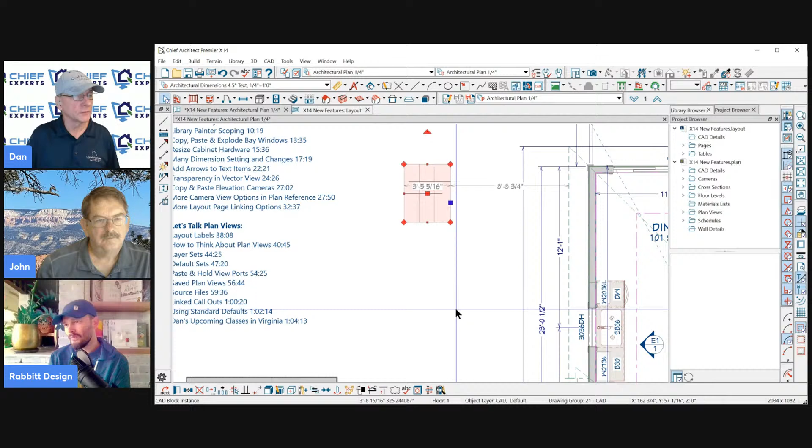Now you'll notice when we have an icon here, it's not the same colors, but I might have put the wrong icon. There's your explode block icon. Okay, so if you click on that, it won't be a block anymore. It'll be back to the individual CAD lines. Now let's just take that one. Do we want to take that one step further? How you edit a CAD block? Sure. Okay, we'll go one step further.

You'll see another little icon blowing apart with a pencil on it. All right, this is something they added, I think, in X13. You can edit the CAD block. You can edit the items that are in the CAD block without exploding it. So if you click on that, it's going to open a new tab. You'll notice what it says up here. It says CAD block window 1.

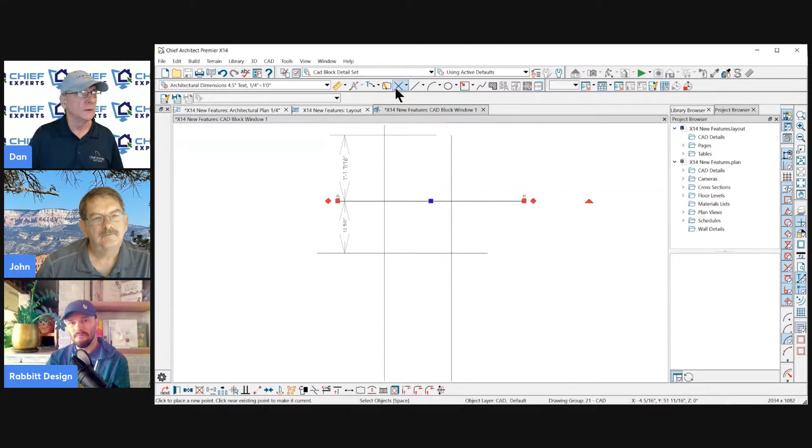All right, so there's those CAD lines, and now I can work on them. I could edit them. I could add items to this. I could add text to this. I'm going to display the text here though. So there you go. So I can edit this all day long. When I close this window, what do you want to do with this now? Remember, I never exploded the block. I'm just editing the block. Now I want to save it. Okay, so I'm going to save the edits I did in that.

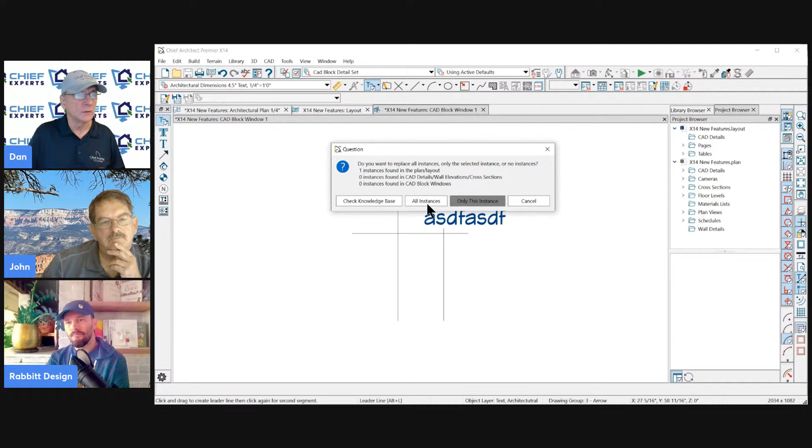And you're going to get another screen that says, let's say I changed an outlet in my plan, the CAD block that is an outlet, to a different size, or I added something to it, I could update just the one I changed, just that CAD block. Or if I have a whole bunch of outlets in my plan, I could update them all at once, just by clicking that. So I'll just click only this instance. Actually, I said that backwards, but you get the idea. There you go. So there's my changes. It's still a CAD block.

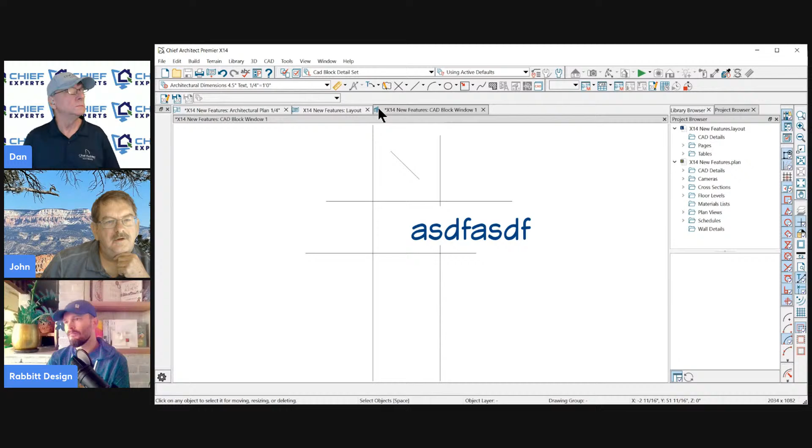I'm good to go. So I saw that when you opened that to edit it, it put it into a CAD detail. Is it still in the CAD detail? No, it doesn't put it in a CAD detail. It just opens it up in a CAD detail, but it doesn't put it in there. It opens it up in a tab. Well, that's a CAD detail sign right there at the end of it, though. Oh, by golly, it is. But it doesn't put it in the CAD detail, though. Okay. I don't know why it does that. Yeah, that's just a CAD block.

Right. But so if you go into CAD block management, CAD detail on the tab, right? Or was there something I can't see? Well, go to CAD block management. Okay. So it is putting it in the CAD detail management category, but it's not actually putting it in the CAD detail. So why, I don't know, John. You got me on that one.

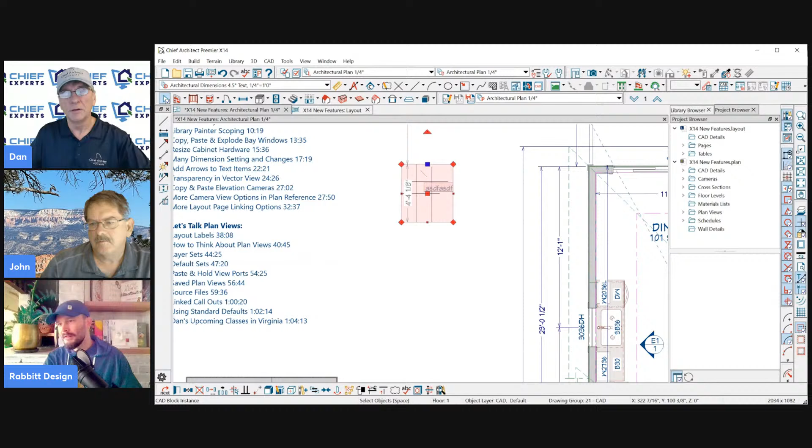All righty. The icon was red. It's different than explode with all blue. I don't know why it was a different color. Do you know why it was a different color? I'll conclude this by saying that spinner wheel, I just dumped a bunch of icons in there. I didn't even look at what they all were. So next time we'll be certain to know we have the right icons. By the seat of our pants. Yeah. There are over 1,200 icons in Chief Architect now. So we'll have some fun with that.

Okay, let's move forward here. Last week we talked about these different things: predictive feedback, CAD layer defaults, library scoping, copy paste, explode bay windows, resize cabinet hardware, many dimensions. I'm not going to go over that. Then we talked a bunch about plan views. This week, let's talk about these few things. Library painter scoping. Actually, I think I did talk about that last week. Let me make you dizzy by going in and out here a lot.

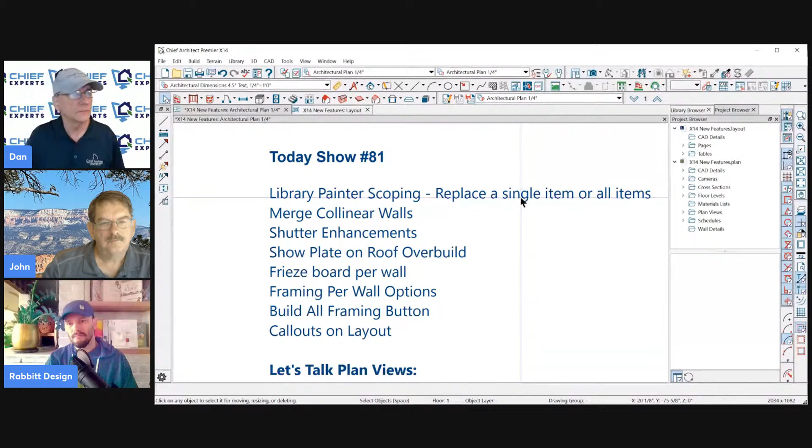Let's just review that real quick - what is that library painter scoping? So if I go into a 3D view...

By the way, when you get your PDF downloaded from the page...

Hey, someone made a comment and they're absolutely right - you did a CAD block, but the symbol that was on this spin the wheel was an architectural block. The architectural block is any kind of symbol class block together, same concept. Yeah, it's a good point though, thank you for correcting that. Yep, obviously I did get that.

Well, we're all learning here. All right, let me get back to where I was. I was going to my PDF, I had clicked on something and my screen froze there for a second. So here's your PDF that you're going to get when you download it.

So when I go in here, the library painter scoping - when you want to replace individual items on things, and again I think I covered this last week, but let me just do it again real quick.

Get into Chief here - oh, Chief crashed on me. Oh weird, it was that wheel spinner thingy that caused it, maybe. I've been having my share of issues with my computer, so I just updated my drivers yesterday, so hopefully that'll take care of everything else.

All right, so back to this. Yeah, that crashed when I did a 3D view. Hope that doesn't continue. It's not the wheel picker thing that's causing it.

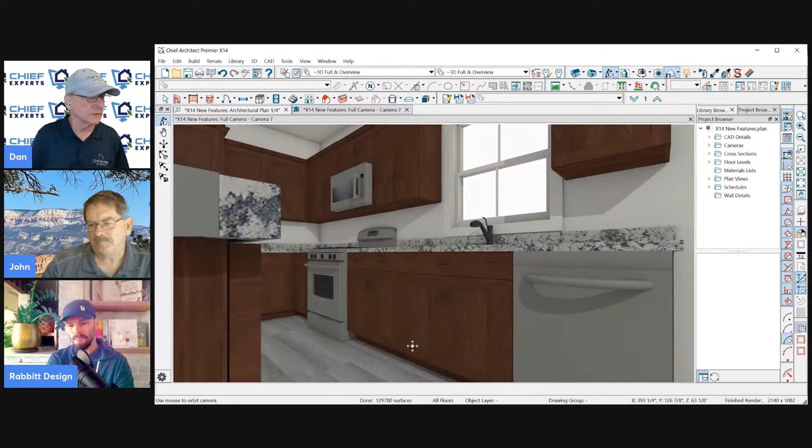All right, so we've got a piece of hardware here. Let's find a cabinet that's got multiple hardware on it. So we've got this, and it's got 3 different handles on it. I could go to my library and search for a handle.

I know I did cover this, but I'll cover it one more time. It's really cool, so I did that barn door handle. I'll do the same thing - when I click on that library and drag it and come to my screen, you see it...

Okay, and this is the icon that we're looking at to replace items in our plan. So that's what'll happen - if I just click on one thing, it's going to replace that one handle. Well, I guess the doors are one thing in this plan, but it didn't replace that. So if I were to hit undo, this time I hit object and click on that handle.

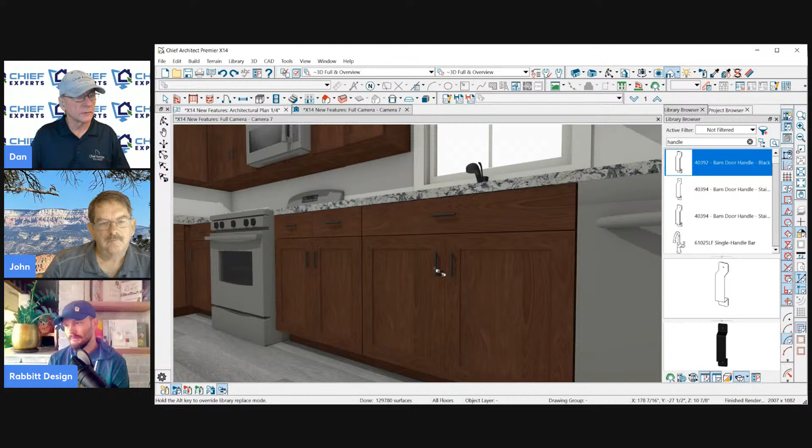So it's going to replace all the handles on the object. It should have replaced that one too, shouldn't it have? Unless it's different - oh, it's different because it's at a different angle. Yeah, okay, that's what's different about it.

If I do the entire room, all of the handles up and down in the room will change. Okay, see, they're all changing. So I would have to - do you like my handles? Floor and plan, so that's how that works. Nice feature, you could do that with different things.

You can also replace, if you have 6 - oh, I did the bar stool thing last week too. I think if you have a bunch of bar stools and you want to replace them all at once, use the same tool, and that works really well.

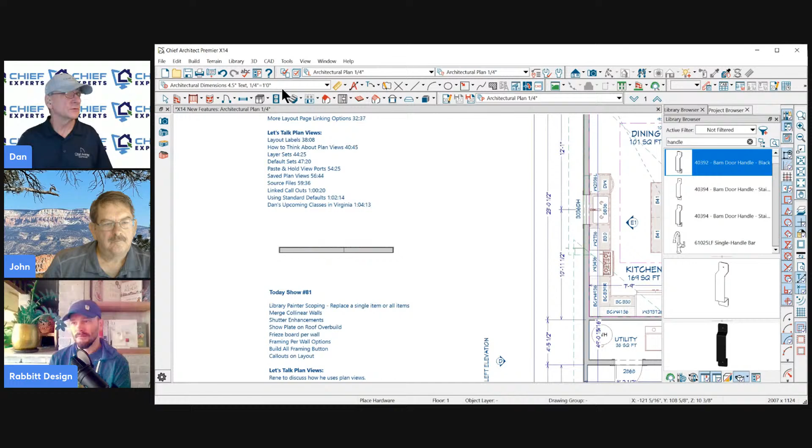Let's merge collinear walls - this is actually a feature that I'm pretty excited about because that drives me nuts. So when we go into our defaults, you go into your defaults and we go to walls and click on the general wall defaults.

All right, there's a new little button down here that says auto merge collinear walls. What the hell does that mean? Well, let's turn it back on, I'll show you what that means.

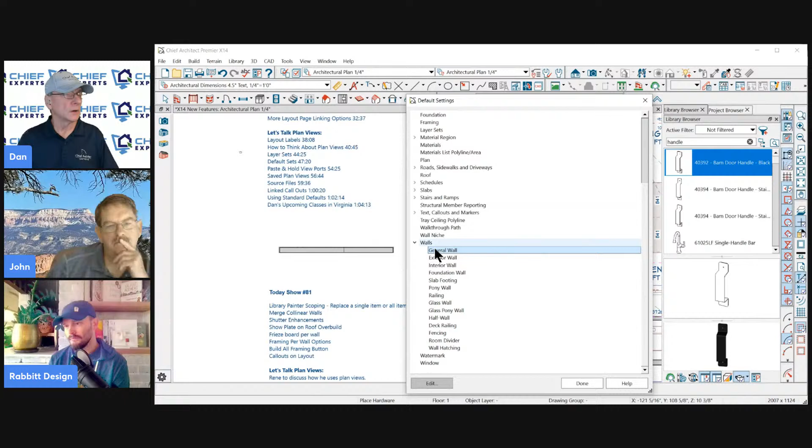All right, so when I draw a wall in my plan, you ever done this where you draw a wall and you want to break it and make some of it framing and some of it not framing or something like that? So when you break the wall and then click on something, open its dialog box and close it, the wall all snaps back to one big wall. All right, drives me nuts.

All right, so this new feature in Chief, I can turn this off now - general wall, auto merge, done. Now I can break the wall and it will not hook itself back up.

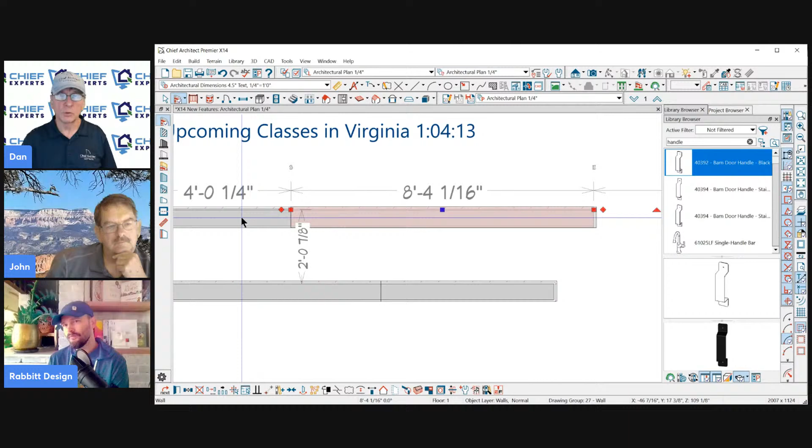So now when I open up the dialog for the wall and make changes to it—something minor where I'm not really changing the wall much—and I close it, it'll stay broken. I can even move where the walls join and join it back up here, and it will stay broken.

Okay, so this is kind of nice for framing. Say I'm going to frame in a doorway and I just want to do framing in part of the wall, just that piece right there. So when I switch to my framing plan, just that part of the wall is framed. That's a nice new feature.

Now, if I want to hook it all back up in one wall, no problem—turn that collinear auto-join thing on and you can do that back. But that would join all your walls back together.

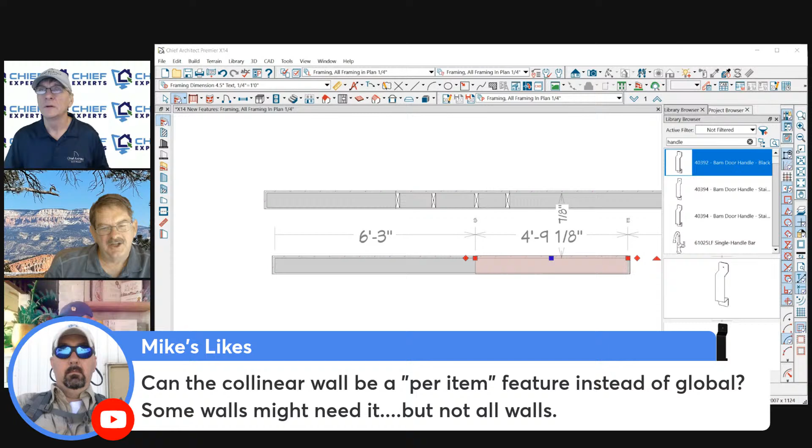Is there any way that you can not join this one only if you jiggle them? Only if you jiggle them. Yes—is that a technical Chief term? That's a CAD term in Chief. Yeah, jiggle—no, I made that up. Jiggling means you click on a point, or move it a little, or open the dialog and close it—you're kind of jiggling, reactivating Chief's ability to snap things together. So the answer to this question is no, it can't be a per-item feature instead of global.

No. So get your stuff done—as long as you know you're not going to go back in and touch your walls at all, turn it off. The other thing about it, once you've done the framing, it won't join back together either.

I don't know about that. It won't change the framing—correct, it won't change the framing. The way I've done it in the past is you just go in and break the wall and make that a copy of the other wall, and now you've got two different wall types.

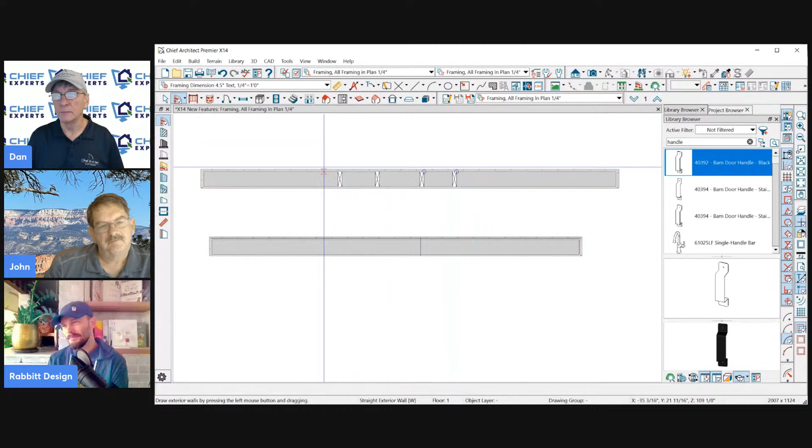So it will stay broken then. Yeah, here—see, I opened and closed the dialog and it all joined back up again, but that framing stayed the same. It didn't change. So if I were to look at the framing in this plan now, I would see just that little piece of wall framed in.

Oh, messed up my plate still. Oh, there's a bug that Chief needs to know about. Interesting—what happens if I open up this? Oh, there it is. Huh, that's weird. Oh, we got one for Chief to look into.

Yep, all right, so I like that little feature. Simple little thing, but really nice when you're dealing with walls that keep snapping back together and you don't want them to.

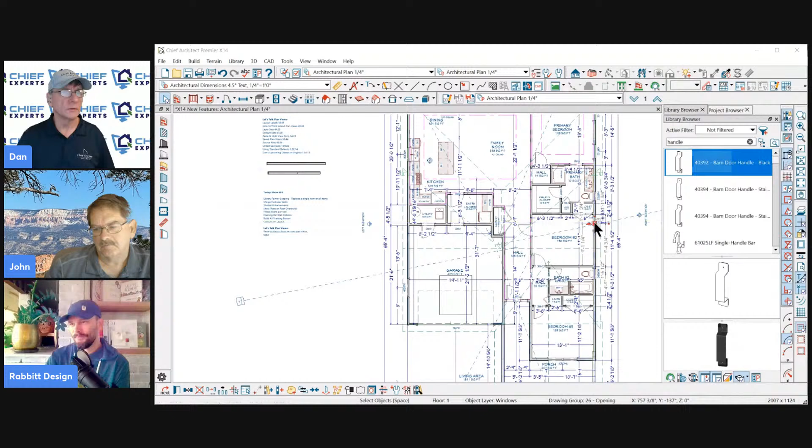Shutter enhancements—it's a silly, stupid thing, but we do have the ability to do more with shutters now. If I click on a window, open its dialog, and go to the shutter option, I can use louvered, and now I've got a few more options, like the louver size. You've never been able to do that before, so now I can actually adjust the louver size.

I can show the louvers closed and open, reverse the direction of the louver—a lot of these things are still the same, but just those silly extra options. Sometimes I'll work on a plan and want to use louvers, so instead of going to the library to find one, this will just do fine and work really well.

Do you guys do much for louvers or shutters on yours? I have two free symbols—actually, one's free, one's paid. One free symbol on my site is a door with a security door, and the security door is a shutter. Oh, so yeah, kind of clever.

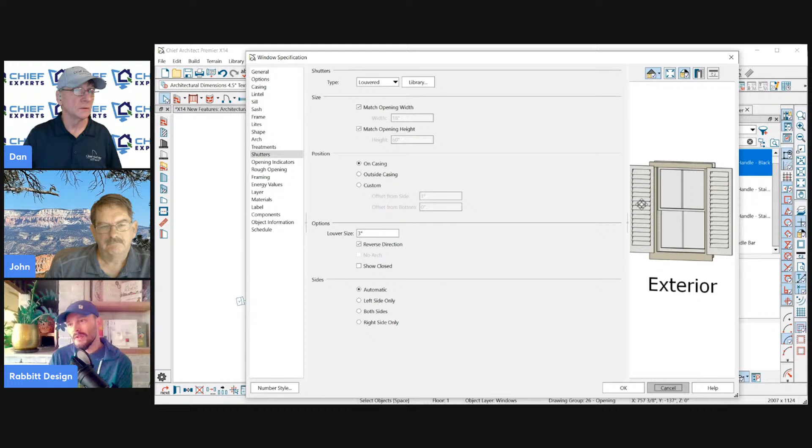I'm glad they gave us some additional options. The other one is using a door as what looks like an operable window, so you can open and shut it. Yeah, you can make a shutter door, and I'm using 100% shutter to create the sash profile from the manufacturer.

Let's see, merge collinear walls, shutters, louver size for shutters - simple little things. Shoe plates for roof overbuild - is this a big deal?

Maybe, maybe not. So when you have a roof, say you're doing a remodel and you're adding an addition to your plan, and when you frame this roof, you want to put a shoe plate down on top of the existing roof. I've tried to do this in the past because I wanted to show it in my framing, and it's really hard to do because you have to use a roof plan. I've been asking for this forever. So now all we have to do is...

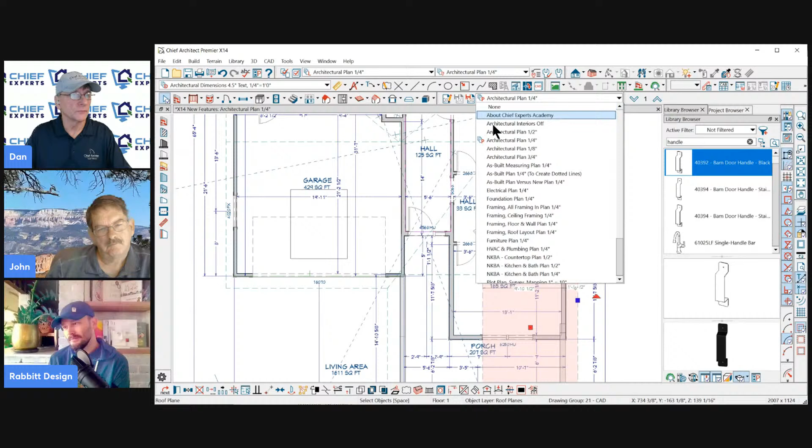Let's switch to the framing view, and we go into - where was this again? Go into the roof dialog, under structure, right down here at the bottom - roof overframing. So overframe to the roof finish, the sheathing, or the framing. If you just want to put those on top of the sheathing, you do that.

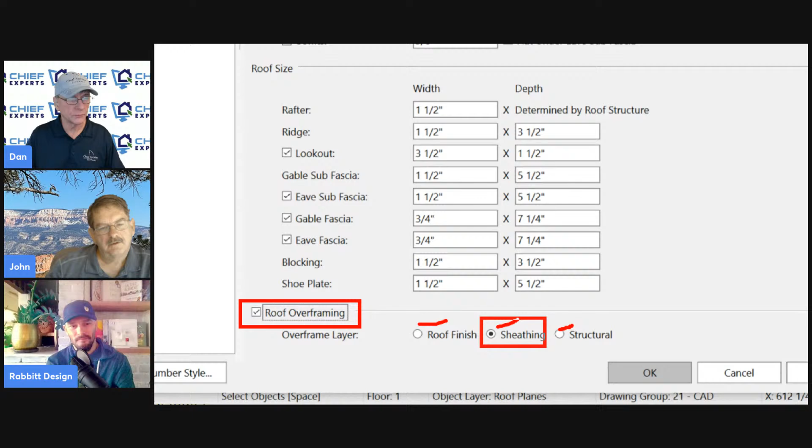So then when I click OK, notice I just did it to those two, not the whole plan. Now when I frame those two roof planes, because it's an addition, it'll put those plates right there. That is really quite nice because this is the way a lot of people do it. So if I bring this up, there they are.

Doing those any other way, I tried it and it's virtually impossible. Well, it should not virtually. Now, although with solids it would be a little easier, this is much easier - just clicking a button. I like that.

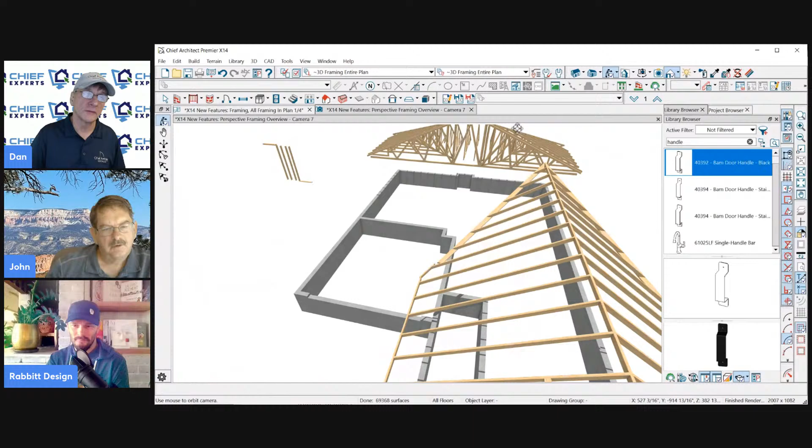Does that replace the truss base option? No, that's just something for hand framing. Okay, I don't know what would happen with the truss base thing - I guess you'd have to try it. Well, we're not going to get into that right now. Truss bases have always been real flaky for me.

I've never been able to put a definitive - this is exactly what you have to do to make the truss base work. I've gotten close, but it still is flaky depending on the plan.

All right, let's go back here. Next item I had on my list was frieze board per wall. You ever had a house where you didn't want frieze board on a few walls? Couldn't do it unless you opened the lock layer for frieze boards and turned it off there, and then of course you couldn't do your frieze board anymore. Now you just click on a wall, open its dialog box, and under the roof tab, you have a new thing to include or not include the frieze board.

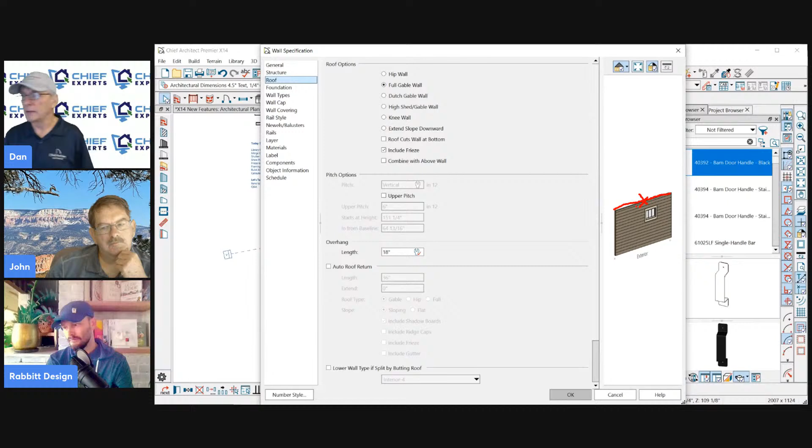So that's under the roof tab, kind of like turning the base on and off for an individual wall. All you're doing is telling Chief, when it puts that frieze board on there - which is a molding polyline - not to put a 3D item on that piece of molding polyline. So that works pretty well.

Let's see what else we got. Come on, computer. Okay.

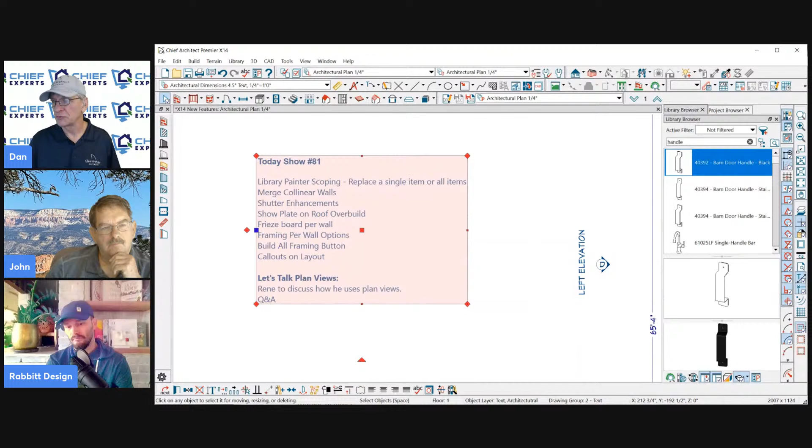Framing per wall options - let's go to the PDF for that. There's a bunch of things there. Wall plates per type - the number of wall plates you can have, the cut length of the wall plates you can specify, maximum king studs per opening, rough opening panel in dialogues. And then a Build All Framing tool, that's different, but let's just look at that particular option in a wall.

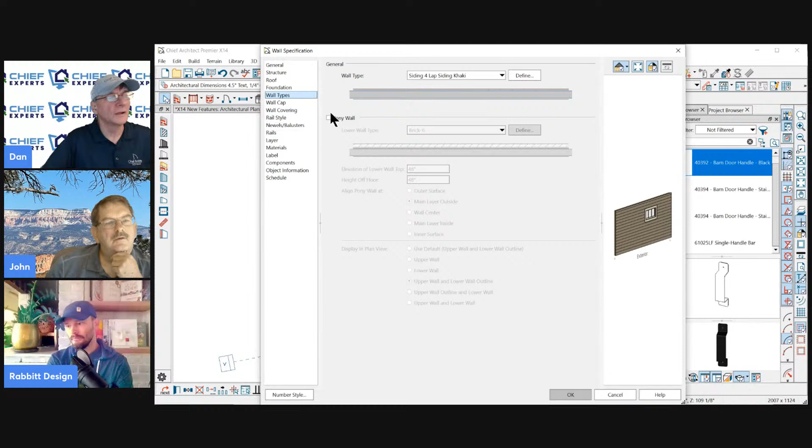Let's open up a wall's dialog box, and then let's go to the framing - right here under... where'd you go? Framing. Where's framing? Hello. Oh, I'm sorry, they moved it - it took me a second. It used to be a separate framing option here.

Now we're doing it under wall type. So when you define a wall type, here's all your framing options now - what kind of framing you're going to use, stud spacing, stud width, top plate count, top plate width, bottom plate count, bottom plate width, maximum plate length of 12 foot. Horizontal framing, that's if you're doing purlins on the walls, you can turn that on, and you'll notice it turns off a lot of these other things. That maximum plate length is probably to help out with the material list, I imagine.

Exactly, so when you run a cut list, you'll get maximum lengths - you don't just get linear feet of 2x6 or whatever. So if you're doing framing in your plans and you want it to be a little bit more specific, you have those options now.

So I see that, yeah, it looks like they keep adding a little bit more to this dialogue. So you really got to pay attention when you're clicking on the different elements here as to what these things say down here. All right. So that's kind of cool because I do a lot of 3D framing plans. I like showing framing, or if you're just doing cross sections too. That way you can adjust the walls that you want to show in your cross sections the right way.

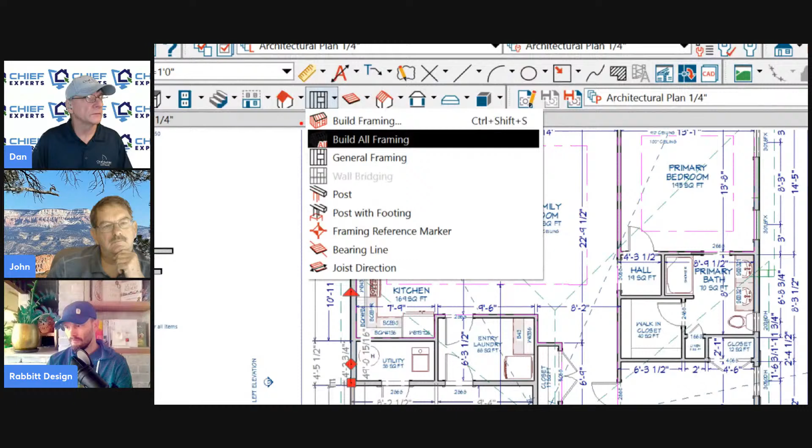All right, a couple more. The build all framing button. Yeah, again, it's a silly little thing, but it's there now. So if we go up to our framing tool, where'd it go? We got a little new icon here called build all the framing at once. You don't have to open the dialog and click through the tabs and click build framing, click build framing. So now we can just click this and do it all at once.

And I'm just going to say cancel that because I'm going to go to my framing plan. You see, I have some trusses built in certain parts. So when you have trusses in your plan already, and then you build all framing, Chief will not put the framing in that spot. So now it's thinking about it. There's all my framing. So there you go. So it's really easy now. You can do that. Take a look at your framing. Yeah, it looks good. Okay. And then later you can come back and make adjustments to these things all you want.

Oh yeah, I wasn't done framing this. So it's a silly little thing, but it's a time saver, versus going the way we always had to do it, oops, I clicked the wrong button. Come on. So you guys got any favorites that you have found? Used to be we'd have to go here and we'd hit build floor framing, then we'd hit build wall framing, then we'd hit build roof framing.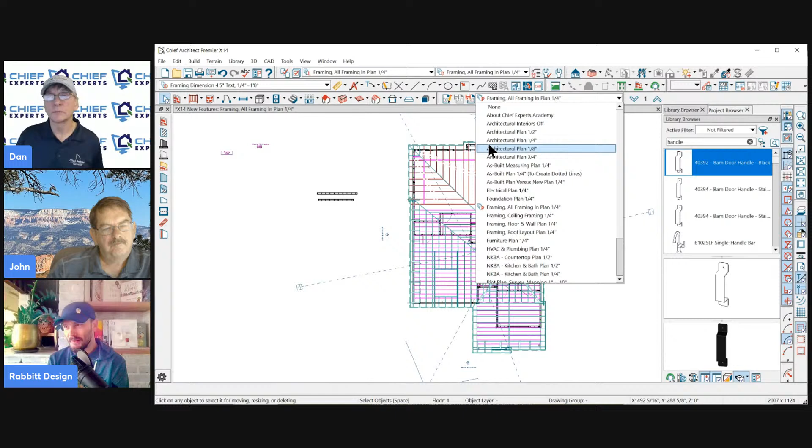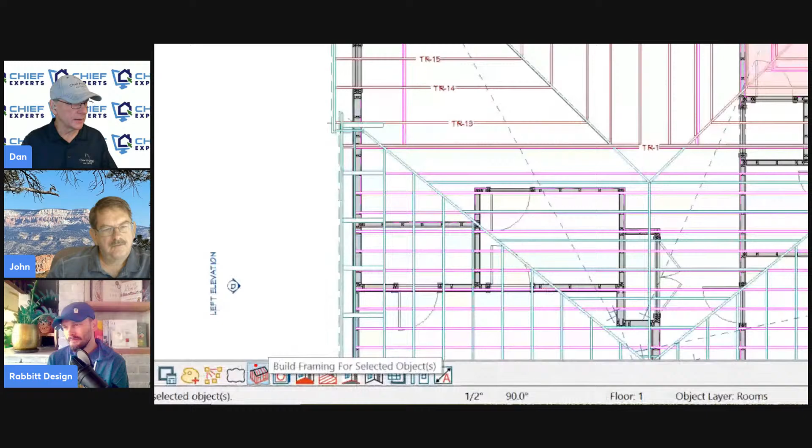Build all. Yeah. I mean, I'm in the remodel game, so I like to select what's being built. I actually really like that feature. The select. So like I'll select a wall that's a remodeled wall and then frame that only. Exactly. Yeah, this is really helpful for new construction just to build all, because it was silly that we had to go through every single panel just to update all framing. Yeah, and I do like that you can frame floor joists per room now. That's kind of nice. That's a new feature. So anytime you see this framing icon when you've selected something in your plan, that means you can frame whatever you've selected. So that is a nice new feature.

So I didn't have time to troubleshoot it, but I was doing that the other day. I selected a room and I did not have that icon. Why would I not have the framing? Yep. Maybe, it doesn't do the ceiling framing, it does floor framing. You have to have framing in the structure. Yeah, maybe the floor was set to concrete. It had been set to concrete, but I changed it. Well, actually, here I've got mine set to concrete and it actually still brought the icon up.

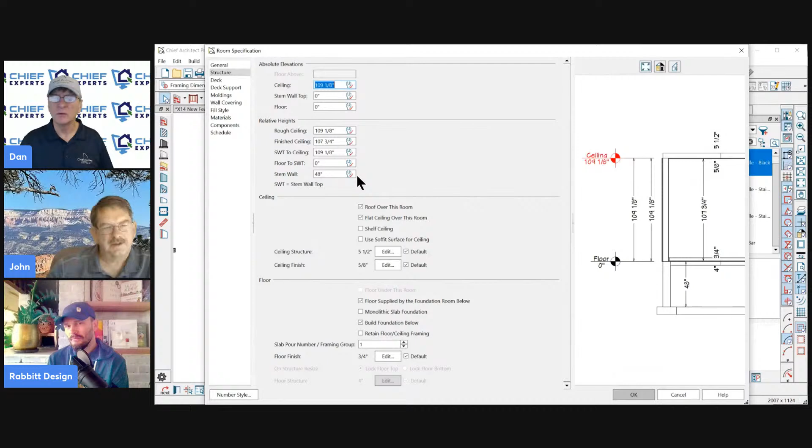What else? Room name? I don't know if room name affects that. If you named it, I don't know, John. It's a plan that I haven't been working on myself all the time. So okay, I don't know. Somebody else did. You were probably in X13. No. Yes, I was. I actually was in X13. Then it wouldn't have been there. There you go. Thanks, Renee. So yeah, there you go. Cool. Let's see. Did I have anything else on my list?

Let me go back to my 1/4 inch and callouts on layouts. Oh yeah, that little bugger. That's actually my favorite. That one's cool. I think we should skip that for today. It's still too big of a topic. You could burn a whole show on that. I know, but we'll just cover it real quick. Okay. Here's the gist of that new feature.

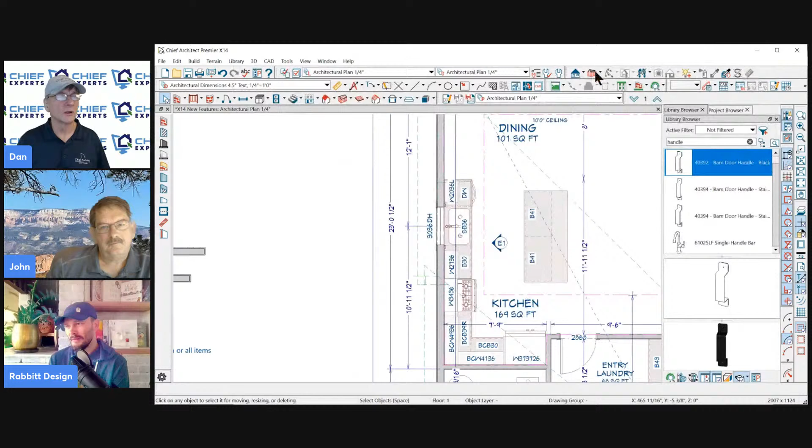And I was looking at this and I was trying to find where it says that down here under layouts. And if it says it here, it's very ambiguous because I just don't see it. Okay. But let me show you guys what we're talking about. I know, Renee, you do one for CAD details too. Let's just cover the elevation ones right now. All right. So let's go make an elevation of this cabinet right here. I already have one there because I was playing with this. So here's my elevation. So I could add my dimensions and text, turn the color on, do whatever you want to it. That's fine. Oh, I see I got my new handles on. Perfect.

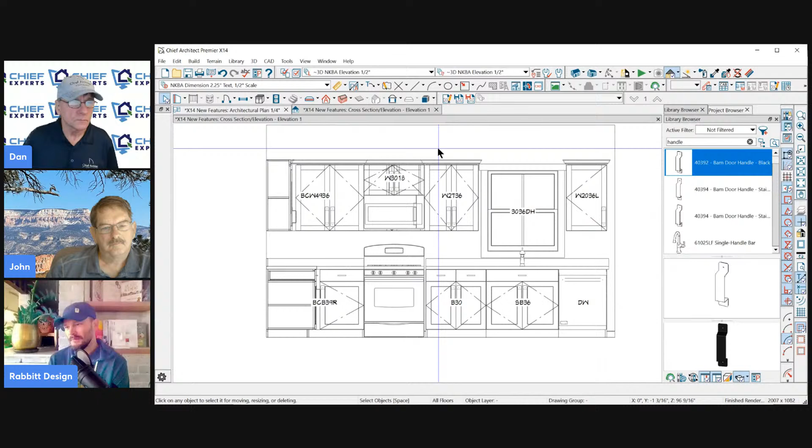So I'm ready to send this to the layout. In the past, with the layout, you'd have to add your own text: this is the kitchen elevation and this is call out number, blah, blah, blah. All right. Now all we have to do, let's start by, we're going to save the view to start out.

If you've written on it, it's going to ask you to save it already, but I'm just going to save the active view. Then I'm going to click on this little tool here or this little tool here. They're both the same. And I'm going to edit this active view. And here's what you have to do. Where it says general name, type in what you want to show up on the layout page.

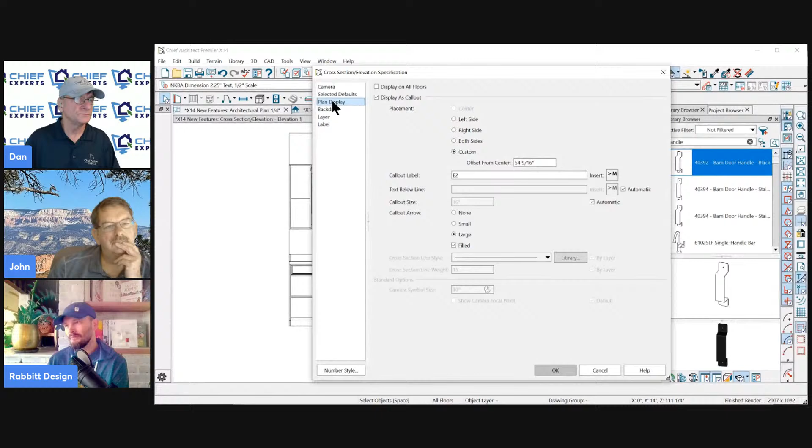Okay, here is my cabinet elevation. Okay, I'm just typing that so you'll be able to see what's going on. So that's what you have to do. That's going to be your label on the layout now. Then you go to plan view and you can change what's going to show up on the floor plan.

Okay. I'm just going to leave it set to E2 for elevation 2 right now. A lot of times I'll just use A, B, C, D or something like that. Leave the text below line set to automatic. If you want the page number to show up in your call out on the floor plan, leave that set to automatic, which is generally what you do. Let's see, under label. Yeah. So that's all I have to do in the camera view.

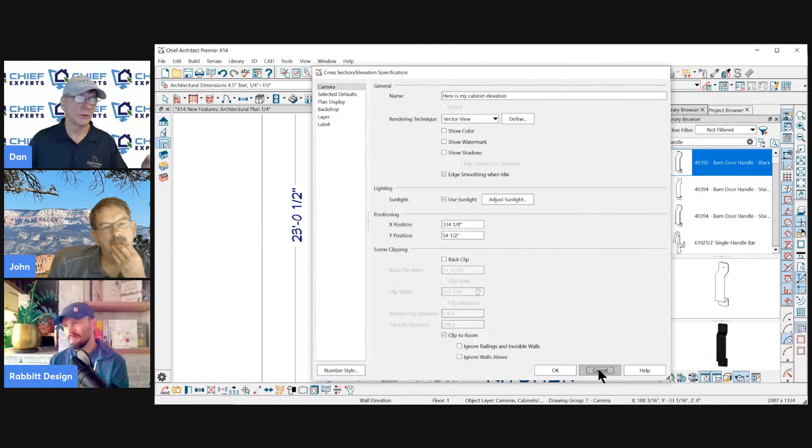I can also do that by clicking on the little call out on the floor plan and opening its dialog box. And it's the same information here. So you can do it either way. You do it while you're in the elevation or you do it on the floor plan. All right, so let's send that view to the layout. Okay, so I'm going to open my layout.

And let's go here and open recent. And I had a little layout all set up. Yeah, let's open that. Here, I'll just go to page 2. Oops. I think this is undocumented and I might be wrong, but I think if you had just clicked send to layout, it would have sent to the layout, since you had already established a view from this. You mean while it was open? Instead of opening your recent layout, I think if you just hit send to layout, it automatically figures out that you were previously linked to a layout, and it sends back to that one.

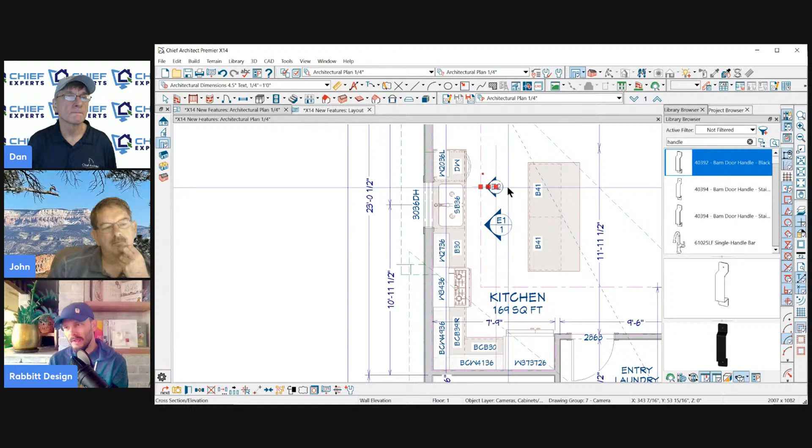Well, no, it would have opened that, but this is a brand new camera. Okay. This was the existing camera. Yeah. Well, I don't know if I go look. I don't know what you're saying. I'm not gonna. Let's just do this. Yeah, keep going. Okay, so I'm gonna open that.

I'm gonna send that view to the layout. So I don't have to open the view to send it to the layout. I can just click this icon down here, or I could open it and then click the icon up here, send to layout. Either way. So I'm gonna send that to layout. Which page? On page 2. I'm gonna have it at 1/2 inch scale, and I'm gonna just leave it as lines, and then I'm gonna click OK.

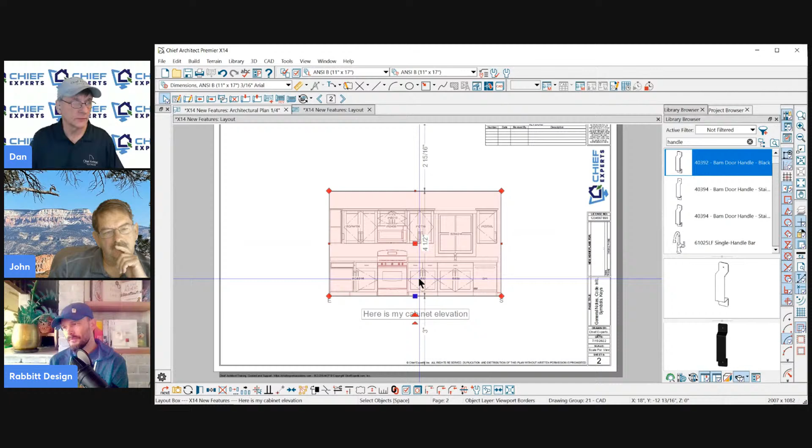Just a comment on that send to layout on the bottom icon there. You can select more than one camera and send them all to layout at the same time too. Yeah, it'll open the dialog box each time to set your scale and stuff, but it is a big time saver. But you notice here now, it says, here's my cabinet elevation. That's what I typed in to that box. Okay, and I can highlight the view and grab the thing here and move this around.

All right, but watch what happens now. And if you don't see that when you send the view to the layout, what you want to do is open up the layer for that viewport. And you want to make sure you turn on the viewport borders and the viewport label. Well, you don't have to have the border turned on, but you have to have the label turned on for this to work. I'll turn the borders off. So now I've just got that. So now you have to do one other thing. Open the dialog for the viewport, go to label and tell it to use the call out.

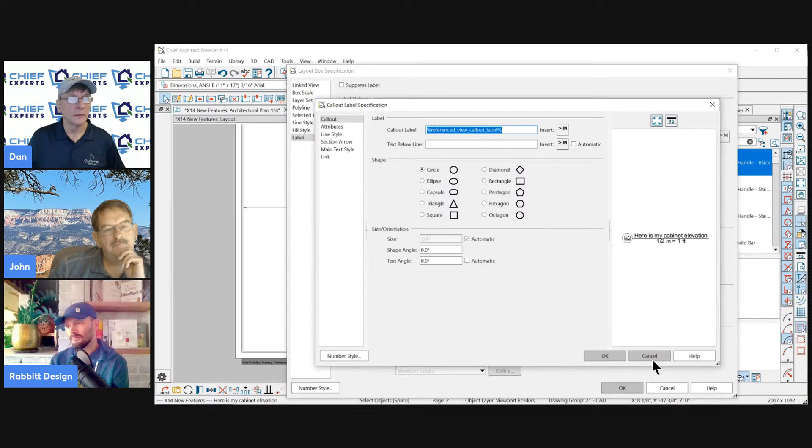Okay, and then you can edit what you want it to say, right. Well, here it's picking up the reference from what you typed in that elevation, or you could change it here and type your own words here. All right, so there you go. And so I'm going to do that. Now I'm going to click OK, and look at this. Here's my label. I can move that around. Done. Okay, I don't have to go create those stupid labels every time.

So that's really nice. Now, the other thing you could do, if you want to have a little bit more information, some people like to have the page number below that. That's one of those give or take things. So there I would have to do an edit. And then here I would have to put text below line, through my global layout info. And then you're going to use the layout page label. And then click OK, and now you'll have the page number. So it's on page 2. And if we go back to our plan, you'll see now it says it's elevation 2 on page 2.

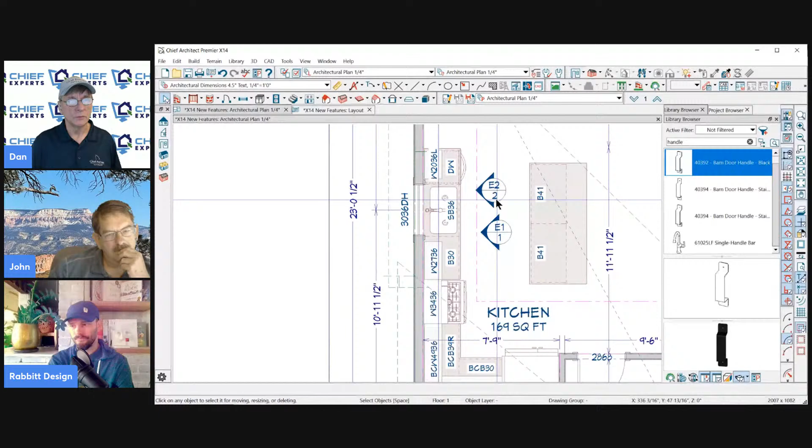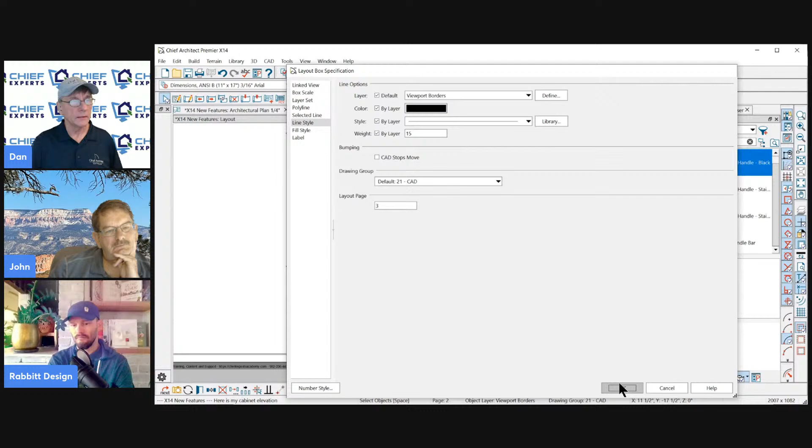Now, what's cool about this, you'll never have to mess with this again if you add and move pages or if you move the view around. So if I go put this view on a different page by opening its dialog box, going to the selected line or line style, I could say, put this on page 3. And I click OK. When I go to page 3, now the page number will be 3. And when I look at my floor plan, the page number will be 3 as well. If you move pages around, if you insert pages, Chief will update those pages automatically. So that's what's really nice about that.

So if I'm looking at my layout here, I go to pages. Here's that page. It's labeled wrong, but let's say I want this to be down here now. Okay, page 7. It changes the page number automatically. That's really cool. I don't have to create these stupid little things anymore.

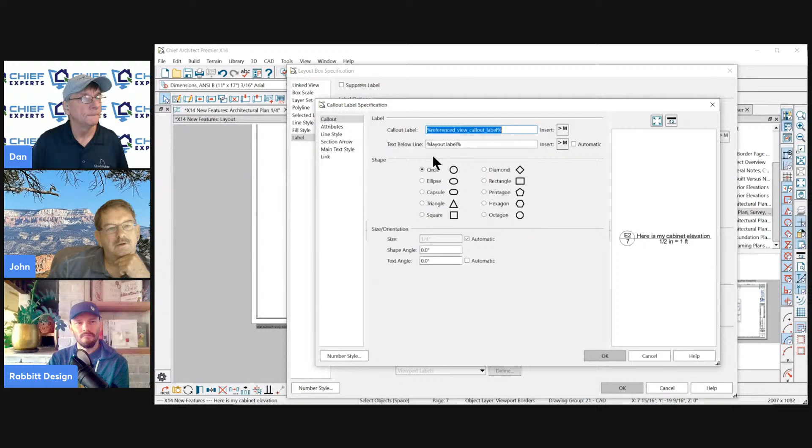Can you click on that again, and then go to the dialog for it and go to attributes? There was something there that I needed to do the other day. Under label, go to label. Okay. Edit call out, and then go to attributes for that. Okay. What was it I was messing with? Text above line, text. I don't remember. There was something that I wanted to label somewhere that wasn't doing it, and I had to do it in the attributes. Okay. So if you're having trouble with that, just look at the attributes too. It might fix what you're trying to do.

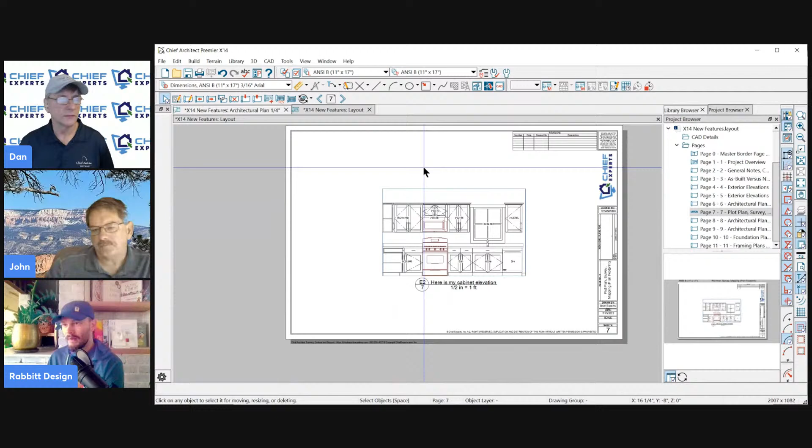Okay. And the other nice thing is you get a preview of it too. Mm-hmm. I think that's new, isn't it? That kind of a preview. All right. So there's some pretty cool things there. That one I love. That's one of my favorite enhancements in Chief that really works well. Maybe next time we'll talk about, Renee, how you do the CAD detail call-outs and those kinds of things. We're going to run short on time. Yeah, sure.

So, but I would love... You going to do another wheel of icons now? No, let's jump into your stuff. I feel like you should be quizzing the group. Only one of those. Wake them up. Just spin it, and then they can comment on the side. All right. Yeah, there you go. All right, there we go. We'll do that. Let's see what we come up with. The wheel of icons. So I love this idea. I'm going to hide this choice, and then I'm going to hit spin, and let's see what comes up.

And what is that? All right, everybody, let's have your answer. I think maybe one of these times we'll start running contests. That's a good one, actually. That is a lot. Yeah. We can't say what it is. We got to let people tell us what it is. That's a good one to quiz. Yeah.

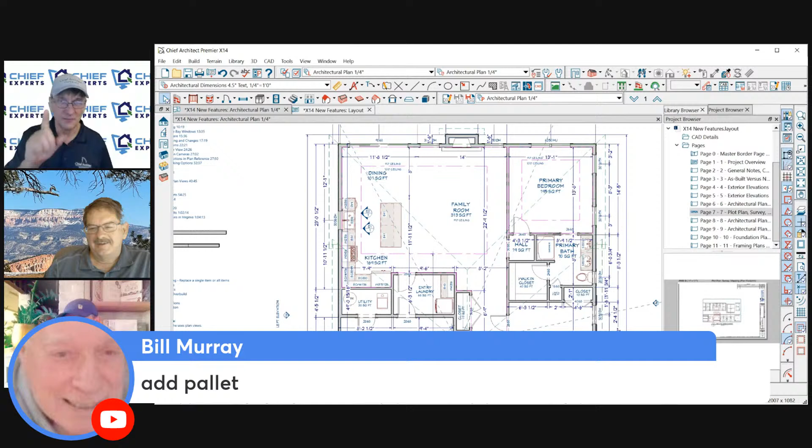Yeah. All right, let's move on here. So Renee, I'm going to turn it over. First. Bill got it first, didn't he? Yeah. Well, he didn't say style palette though. I don't know. Yeah, I know. We probably should give it to Doug. Gotta be specific. That's the standard here. If this is Wheel of Fortune, he wouldn't have got the prize. Fortunately, it's not the Wheel of Fortune. All right, I hope you guys are having as much fun as we are with this.

Renee, what do you got? Look here. I'm not being a pain this time. I actually clicked on the share screen thing. There we go. All right, I'm going to make it full screen so we can see your screen.

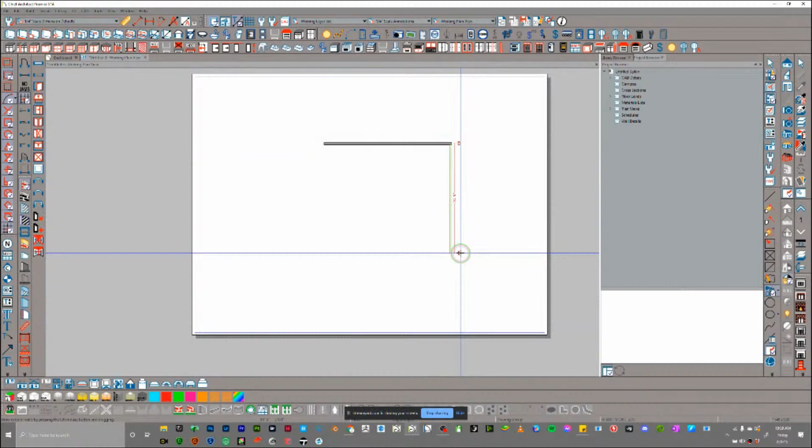So we're talking about saved plan views, right? Yeah, let's talk about that because last time we talked about plan views, and I like to use default sets. You don't use default sets. I'm not saying you don't like to. You just don't use them. And I was curious why. Well, and our old school people know we used to call them annotation sets, right? Yes. Right.

And here I'll do a demonstration. This is not my plan template. This is Chief's residential plan template. So we know that we have a number of annotations here. Let's see if I need a magnifying glass, right? So we've got all these. We also have a number of different plan views. Default sets now, though, right? Yeah, and even though they still show annotations, right? Then I've got my saved plan views, and this is your residential template, your out of the box template.

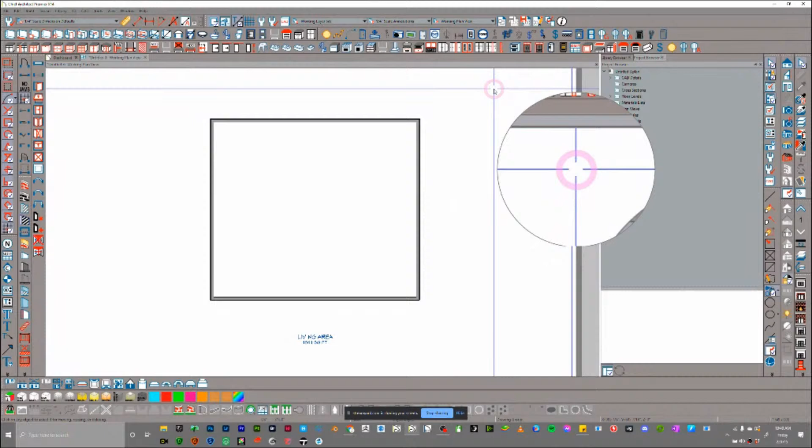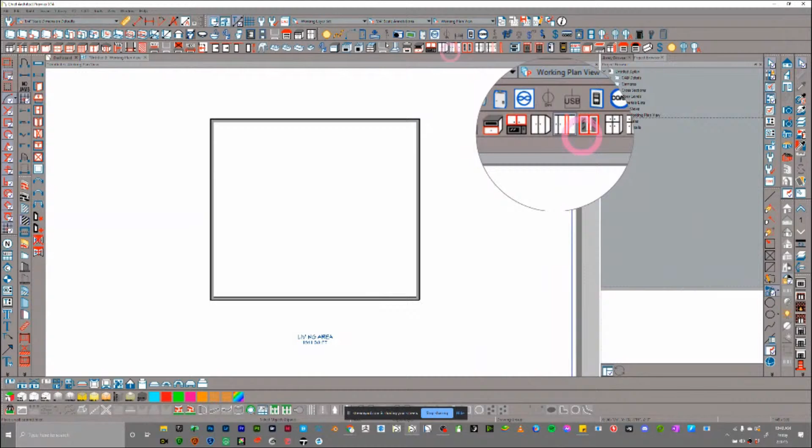Yep. So let's just mess it up a little bit and see what happens. That's the only way I could think to explain this. So I can get into the project browser, and in plan views, I can kind of group select. So I'm going to shift select everything and then just delete all these. Okay. So I'm not going to have any plan views but just one, the working plan view. That's all I got left. Now I'm going to get into my default sets,

and I'm going to click on this little icon, edit default set, and it's going to show all my default sets. And you can't do a shift select here, but I can just start from the bottom, click on delete. What happens if I try to delete all of them? Well, it's not going to let me. You have to have just one. Okay. Clicked on OK. There we go. So we have one saved plan view. We have one default set. And can we function with that? You still have all your old layer sets.

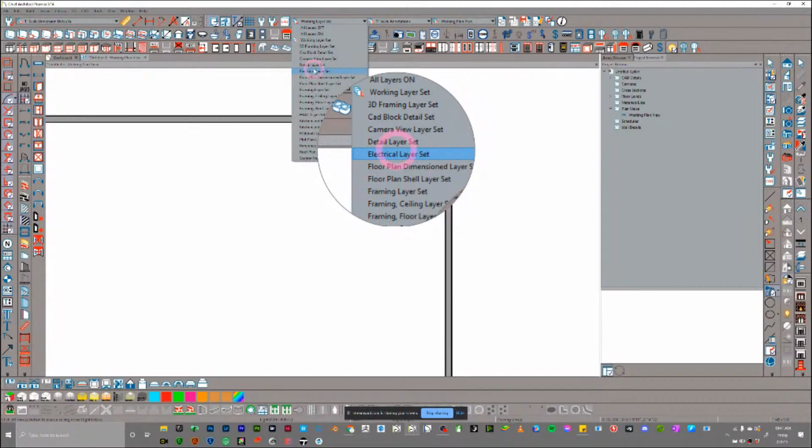Yeah. So I'm going to drop an electrical symbol in here. We're in the working plan view. What happens if I switch? And this is taking it back, right? All of a sudden we're back into just switching layer sets all the time. Yeah. So if you've been in the software a lot, you know that this was a workflow that we had before. So now I've got an electrical symbol in here.

Let's drop a couple things in here just to see some differences. And then maybe we'll turn on framing, right? We're going to frame for this room. And I don't want to show the display. And I'm just going to say no to everything. So now I've built framing for everything, right? But we don't have any way of seeing that without just changing our layer set. Well, let's make a few saved plan views.

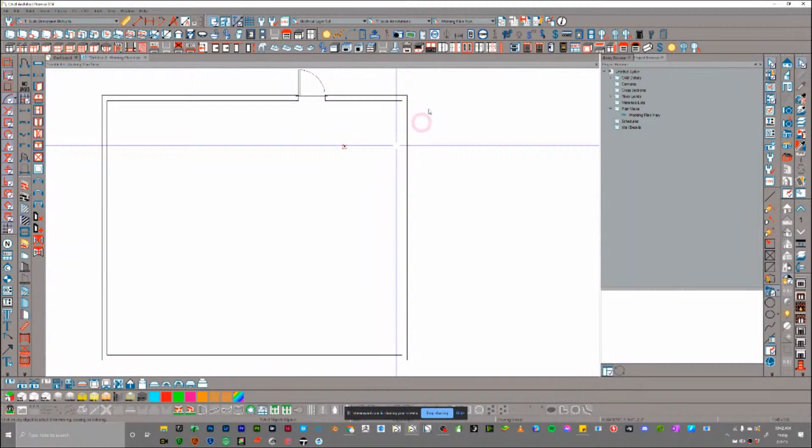Let's just switch over to our framing floor layer set, or a framing roof layer set, any one of these. And we haven't built a roof, so that would be helpful. Build a roof. And we can switch over to any number of sets. And from these sets in our toolbars, we have the option to save active view as. And so now we're establishing a saved plan view. So this can be my electrical plan. So if we're just starting back from the beginning, now we have an electrical plan.

Well, what happens when I want to write text and I want it to be on the electrical plan's layer? Well, by default, it's just going to be on the layer text. And why is that? Well, because we have nothing pointing this saved plan view to that set of defaults that we had established where we want it on an electrical text layer. So I'm going to hit cancel. Instead, I'm going to go into my edit active view.

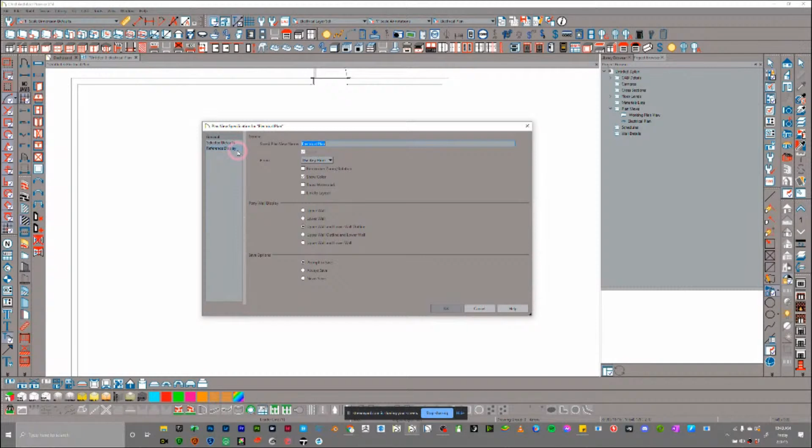And so this is if you want to take the approach of, let me start where I can go bare minimum and then come back and kind of establish what I want. Well, it used to be that we were setting up annotation sets, what are now called default sets, right? So we could be setting up a bunch of default sets. We're establishing which set of defaults we want with our saved plan view, except for now saved plan view, that's redundant. So in our saved plan view window here, we have selected defaults.

That selected defaults panel, this is where we can come in and designate things like, I want to set this to electrical text defaults. I want to set this to electrical rich text. I want this to be my electrical dimension defaults. So it's redundant to the default sets, right? And once you recognize that, you realize you just built an electrical plan that functions perfectly well exactly the way that you want it to without needing default sets.

We still only have one default set, and you see it switched off of that one default set to using active defaults, and that is pointing to the saved plan view's active defaults. This gets really complicated to explain. I'm sure it's complicated to understand. So it only took me a couple of years to understand what the hell it meant. Right, exactly. So instead of having our default sets driving our sets of defaults for a view, I'm using my saved plan view to store those defaults instead.

Okay. And on top of that, we get a little bit of extra functionality. In our general tab, we can say that we're going to use any floor we want to, which is really powerful. And that's what I'm using in my current plan templates, because I can send one view of electrical to my layout. And in layout, the way it's linked, I can set which floor I'm on. And then I can copy that to another page in layout and then set that it's going to be on the second floor. So we only need one saved plan view for multiple floors now. And that's really a powerful thing.

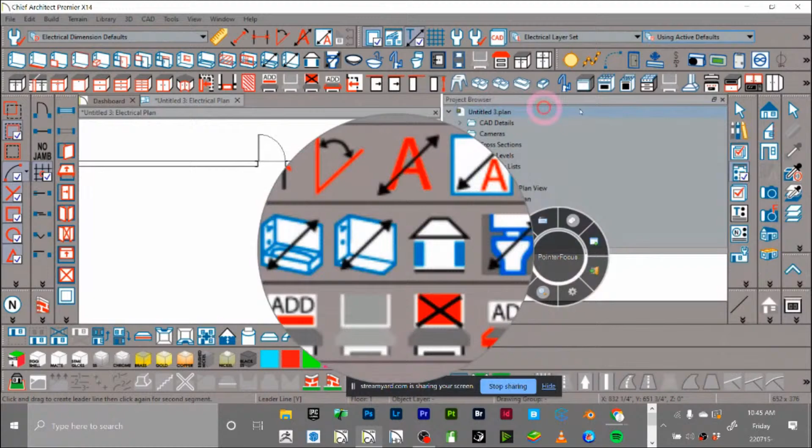I'm going to stop you for 1 second. Bill asked, why is your screen unreadable? Renee, are you running 4K? Yeah. Okay, so you got really high resolution. Getting compressed. So if you guys are running a smaller resolution, make sure you're making this meeting full size if you can on your screen, and that will help. Yeah, I actually have two screens. I keep one screen set to 1920 by 1080 when I do these kinds of things. Yeah, here you can see it better, but now your icons are... Yeah, now we're pumped up to the moon. Yeah, exactly. So if you could go halfway in between, that would probably work. Let's just see if I can get to the default set. That's a little bit better. Yeah, that'll work for today.

More or less. So I keep reverting back to the default toolbar just for the purpose of teaching. And I notice it doesn't even show our layer sets in our default sets. It only shows plan views. Yeah. So it's tricky to even get to this stuff if you don't know. It is. I know. And I mean, that's an indicator from the developer that where we're headed is that we don't need to be paying attention to those layer sets and default sets as much anymore, is how I take that.

So how do you handle it if you are working in a saved plan view and you change a layer set? Well, tell me the purpose of changing that layer set. Sometimes if I'm working in a saved plan view and I want to go find something, I'll go to all layers on or all layers off, kind of thing. So I have two approaches to that. One is I have a working plan view.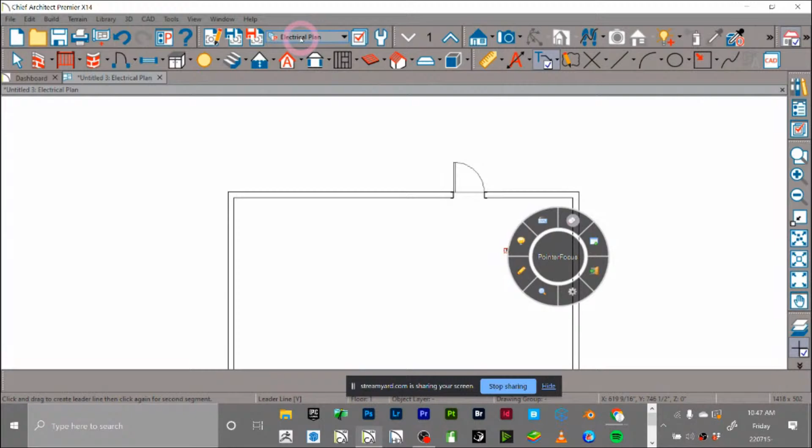I call it working plan view because I'm prepared to mess that plan view up. I'm prepared to turn on any layers I need to turn on or hide any layers I need to turn off. I wish you had this in your wheel of icons. I have the hide layer icon in my working toolbars, so that I can turn a layer on as I need to in my working plan view and then quickly go hide it again.

The alternative method to that is you switch your saved plan view to none, then make your changes, then make your layer set changes if you need to go find something. Or you could just be working in none and know that whatever layer set you're in, it doesn't matter. It's not going to associate with anything. So you can create a billion layer sets to show whatever you want to show, so long as you're not modifying one that's linked to a saved plan view that you care about.

We set up layer sets for a client once, and we put an L in front of every one that was intended to go to the layout. He didn't touch those when he was working. The great method. Yeah, absolutely, it's a good training method.

Just to dive in a little bit more on the power of saved plan views and why we even want them. Why can't we just do it the way we used to in whatever version it was, where we didn't have saved plan views? Might have been X9, I don't even know anymore. X1, I think, was the first one with saved plan views. No, not saved... saved plan views are newer. Yeah, those are way newer.

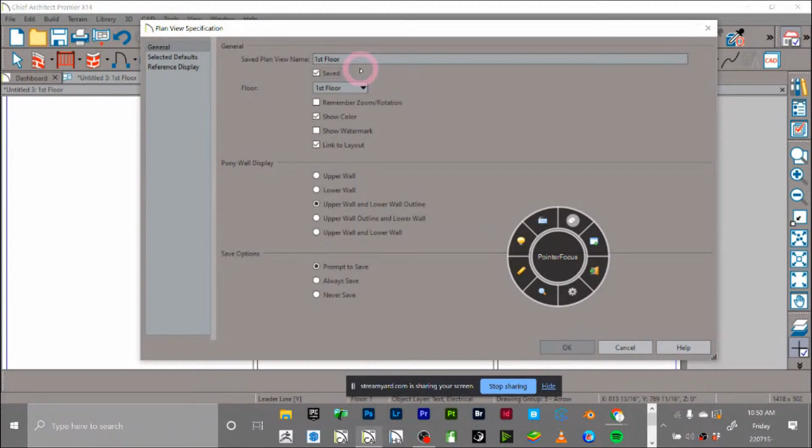And by set to a different scale, I mean set to a layer set that has different scaled text and dimensions. So your dimensions and text defaults are driven by, say, a half-inch layer set, where the rest of the plan views use a quarter-inch layer set. So we can do a zoom level on a bathroom or kitchen for those little details, where all I have to do is switch to that view and I've got it zoomed. So I'm going to check remember zoom level.

And that you're going to be answering this question right here too, right? Where do you control the text size for a plot plan? My plot plan texts are always too big. Well, I like to drive all of my text-based annotations based on text styles.

So if you have that workflow built into your plan template, you know how to use just the regular text, not rich text. If you're just using regular text, you can switch all text within a saved plan view by switching the text style associated with the layer that text item is on. So if it's a dimension layer or a text layer, you're going to drive that text style for that individual layer on your plot plan saved plan view.

It's hard to show this as quickly as I can say it, and we only have so much time. So I've got a first floor plan, right, and I create it from—it seems like the electrical set. I'm lost without my regular toolbars. Oh man, I might have to just pump this up, pump this down, button size.

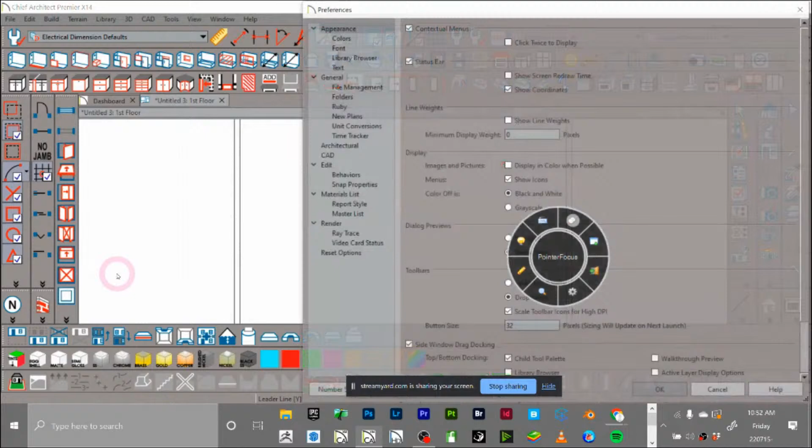This is always good to note, and I love throwing this out whenever it comes up. If you've got a global change to the software, it's in preferences. If you've got an individual change to an architectural component, symbol classification or something like that, it's going to be in default settings.

So let's just save this so I can come back to it. Untitled 3. By the way, to relaunch the program, X11 was the first one to have plan views. Let me relaunch this, and I changed my icon sizes so we can actually see. So here we go, I've got a working, let's see, open recent, Untitled 3.

So there we go, we've got an electrical layer set associated with the floor plan, first floor. Now what happens if I switch to the electrical plan? It's going to prompt me to save. Now this is also another powerful feature of the saved plan view.

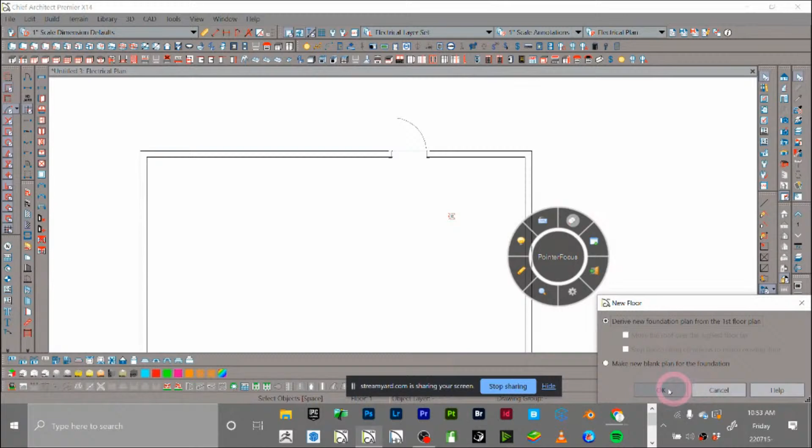You can set your saved plan view. If I go into edit active view, down at the bottom here, save options, we have the option to prompt to save, always save, and never save. So what that means is as we are working and change something, like if we have this set to use the first floor and I save this and press OK, and I build another floor, now if I try to switch off the electrical plan view to first floor, it's going to see that we registered a change.

And why is that? Because all of a sudden when we built a floor, the view changed to that floor that was being built. And so if we switch off of that saved plan view, it wants to ask us if we need to save that change or not. So something that's powerful - and I'm going to say no because I liked the floor it was associated with. So if I switch back, it's going to be back on that first floor level.

But if you check never save, it's always going to keep my established saved plan view. And this is really powerful if you're using a template plan, right?

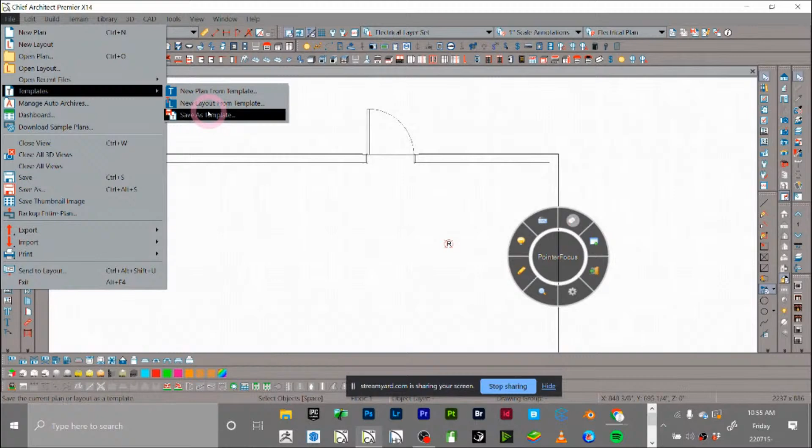If you're using the save as method, where every change and update you've made to your current project, you want to save that as your default for all projects going forward, we can get into the file menu, and we're going to get into save as templates under the templates section. If people don't know about this, you go into your file menu, templates submenu, save as template. What this is going to do is save my current project as a template plan to be used for every new plan going forward.

So really powerful things here. A couple things, let's backtrack. We've got a saved plan view. We've established it the way that we like to establish it, right? We don't want to mess with it ever again.

Now we can say we never want to save this view, no matter what manner of messing up this view we've done - we never want to save it. We don't want to save the new layer set that we incorporated, nothing. But if you change the existing layer set, it's going to keep those changes - it's not going to revert back.

So let's try it here. I'm going to edit the active view and say never save. Let me just zoom in on this. I'm going to click on never save, okay, and I'm going to switch my layer set to a camera view layer set. Now I'm going to switch my saved plan view back to the working plan view.

Okay, we've switched - no, that's not what I'm saying. If you add something to that layer that's part of the saved plan view, it won't let you know that you added something to it. You added a new layer to it. We don't have any prompts to never save on layer sets. Kind of a cool feature.

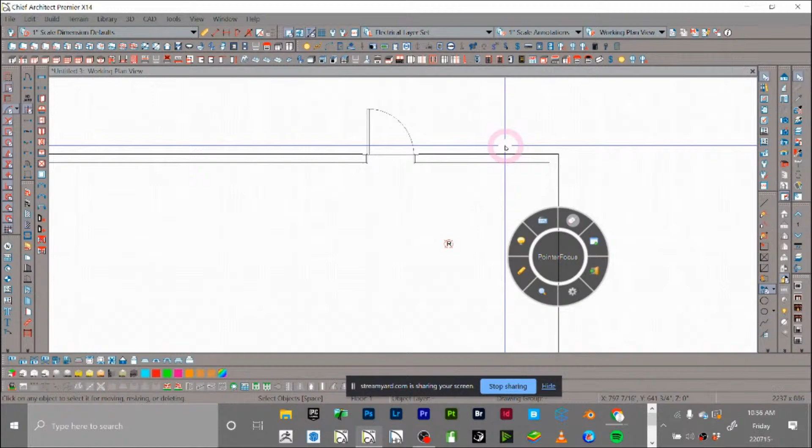So if you turn on electrical on your framing plan, it's not going to correct that - you're stuck with that until you go turn it off. Which is why it's kind of important to have a layer set like the working layer set where you can kind of mess it up as you need to.

So if I switch back just to make this point, which was not what you were asking, we see that my electrical plan view was reverted back. And taking this full circle, the reason this is important is because we can have a set of saved plan views that we are allowed to mess up as we need to, just to get the job done in terms of designing it, in terms of building the model.

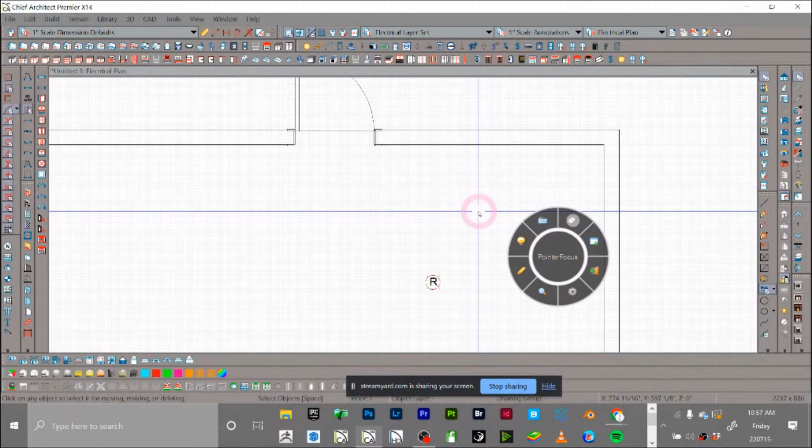We can do that just on the working set. In fact, I even do all my annotations in the working set, and that's what it should be viewed as - something we can mess up, so that when we switch back to something else, we know that it's going to be exactly what we want to display in our print set.

So now if we have saved plan views that are established and we can depend on them to look exactly how we want them to without ever having to even touch them, well, now we can have them pre-sent to a layout, and that layout will be the same every next project. It'll already have those views set.

Let me just give you an example. So we'll get into my plan templates real quick. Yeah, make this quick. I know we're running out of time. Yes, we are. So here we go. I'm in my working set.

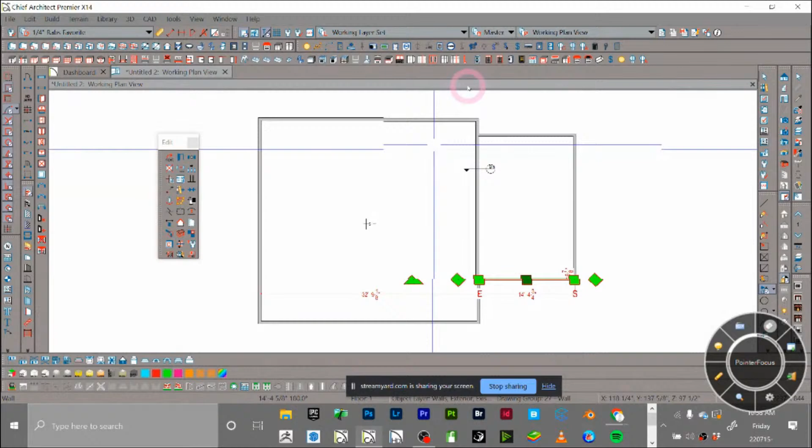I'm going to draw a couple walls. I'm going to pop in some windows just to differentiate this from everything else. And I'm going to mess this up any way I want to, because we're in my working set.

And then when I open up a layout - oops, get this out of the way. It's hard working with a big screen like this, big icons and everything. Yeah, I know. Here we go.

I've got a layout, and this is a new layout - a brand new layout. And the only thing I need to do to link this to this plan I just started is I need to save this plan.

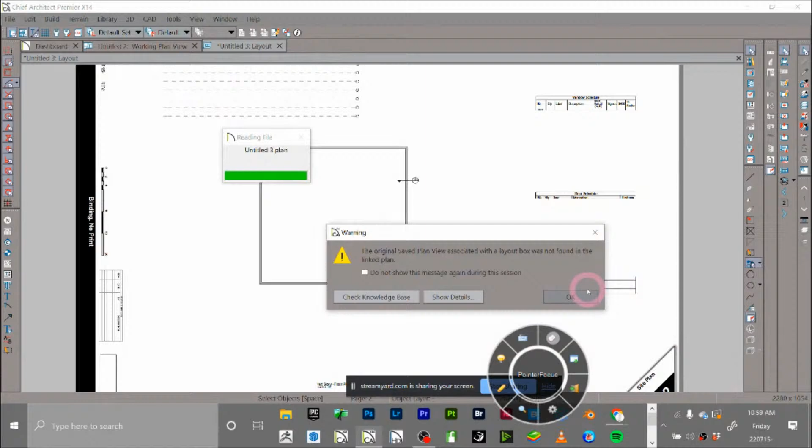But other than that, we should have views that are already pre-sent. And so it should already establish that we've got our electrical plan view, we've got a roof plan view, we've got everything.

Cool. We always run out of time on these things. We need like a full show on this.

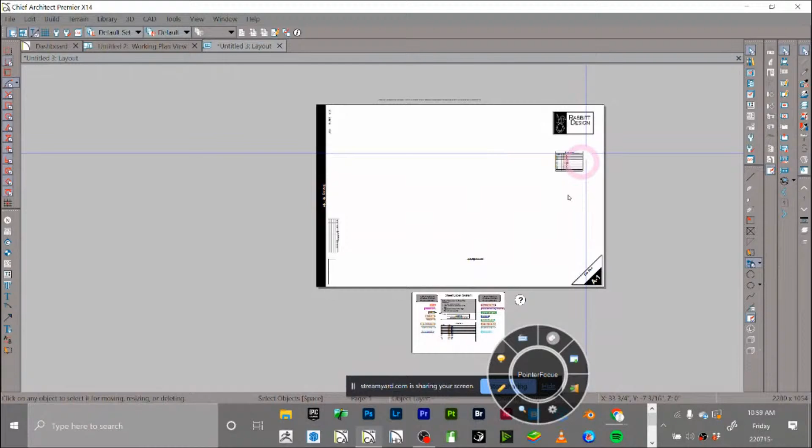So did you bring that layout from a template or from just a layout? And this is a template layout - it's just one of my template layouts with views that are pre-sent.

Okay, and the linking's not set up because I used the wrong template plan. But if you have a template plan, so long as all the plan views that exist in this template plan exist in the plan that was pre-sent to layout, you will, when you relink, automatically have your floor plan, your roof plan, your electrical plans already sent to layout. All your elevations are already pre-sent to layout.

Half your work's done by the time you even use the new recentering tool for the viewport. Yeah, it makes it really easy. Which we could burn another show on. Exactly.

Yeah, so, or 10. All right, cool. I learned some things there too. I learned a lot about how you think, but the flexibility in the software has grown dramatically, so it's really amazing.

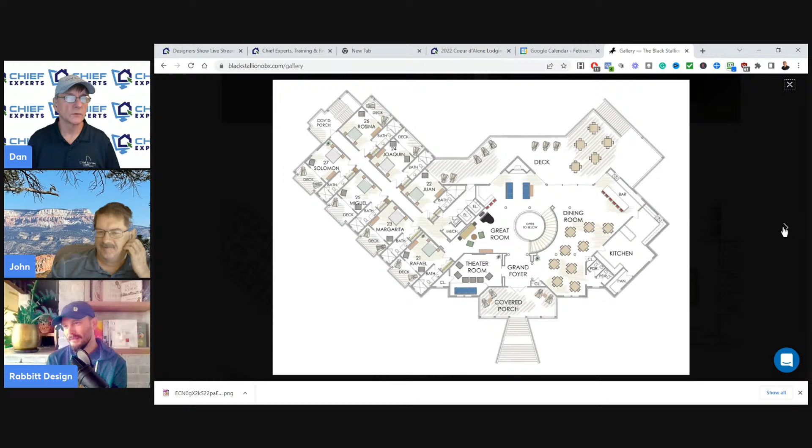So I'm gonna wager Chief Architect symbols on games of pool. Do what now? I'm gonna wager Chief Architect symbols for games of pool. Oh, are you a ringer? That's the room right there. Yeah, I bet you're a ringer too. So what do you get in return?

So mark your calendar. Go check out blackstallionobx.com, and this is going to be cool. I'm pretty excited about this. You will leave with a lot more knowledge than you thought your brain could hold. At least that's what I'm hoping. All right, enough of that.